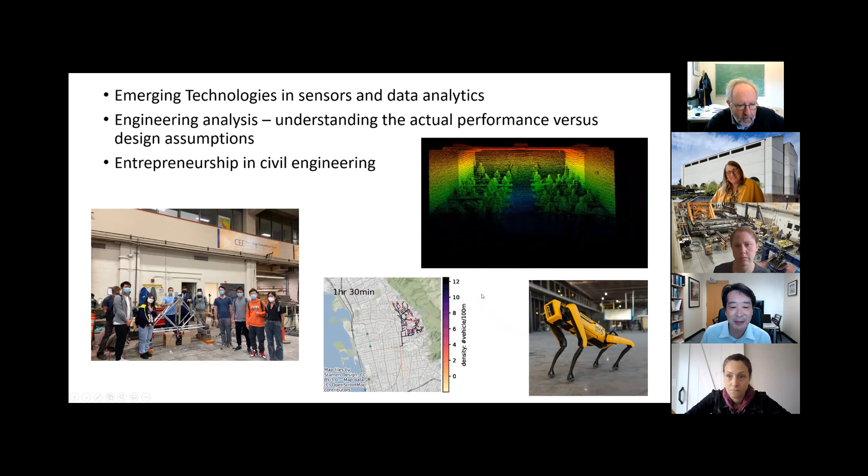Thank you very much. Thanks, Kenichi. Ada, how would you feel about going second on this parade?

Sure, I will bite the bullet and be the one to go after Kenichi's cool video. Thank you for that. So I did not have a production team for my class, but let's see. Okay. Can you see my screen? Yes. Okay.

So the class that I'll be describing is C175, Geotechnical and Geoenvironmental Engineering. And this is the class where you first get exposed, introduced, and hopefully learn some of the fundamentals behind both geotechnical engineering and a little bit about geoenvironmental engineering.

And so when we talk about geotechnical engineering, we basically describe the part of civil engineering that deals with natural materials that are found fairly close to the surface of the earth, which is what separates us from geologists and seismologists. We discuss basically the principles of soil mechanics and rock mechanics to a lesser degree, and how these affect the design of foundations, retaining structures, and earth structures.

In addition, we include certain elements that would then lead towards future classes that focus more on geoenvironmental engineering. We discuss properties of soils that impact the way contaminants may travel within soils, or how we would be able to get them out as part of a cleanup in a contaminated site, and also discuss a little bit about remediation of these sites.

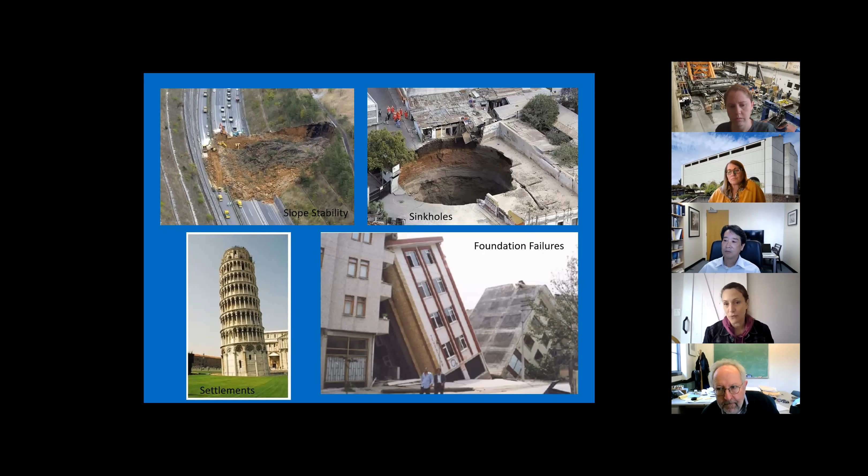So in terms of how the class tries to address that, we do focus, as I mentioned, on the fundamentals behind soil mechanics. So we start by studying the physical properties of soils. So this focuses on the mineralogy and specific characteristics that come with soils that then control what we study next, which is the mechanical properties. So how easy is it to compress some of the materials? How strong are they? And again, how that would relate to future analysis.

We will look at hydraulic properties of soil materials, and then also discuss basically the soil mechanics and hydraulic laws that govern these relationships. In terms of how we normally go about learning about these things, it's a multifaceted approach. And we won't cover everything in this class, but as you just saw in the class that was described before, observation and monitoring the behavior of existing infrastructure is a critical component in understanding how it may behave in the future. And so we do discuss case histories in the class.

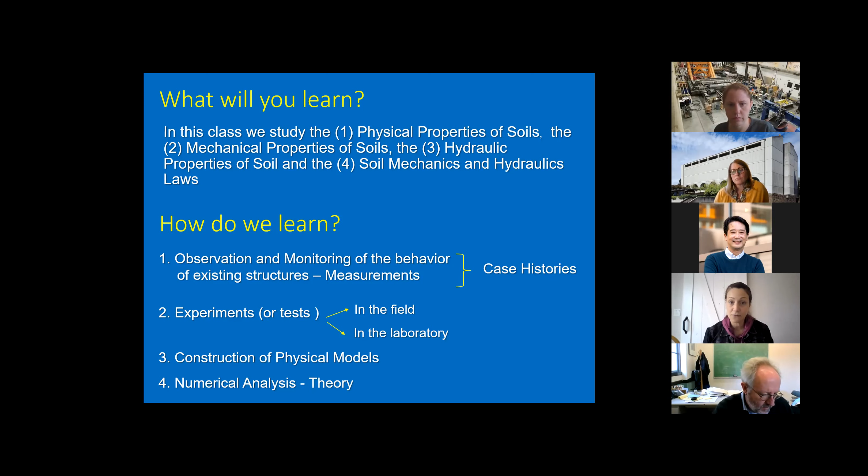We also focus on experiments, primarily in the laboratory, but there's also a field component for future classes that this class would definitely prepare you for. And we can also look at how we can construct physical models that are in a smaller scale for geotechnical applications to better understand the full scale response. And finally, we do discuss the theory, as I mentioned before, the laws that would be behind numerical analysis. So this class focuses on some of these components, but definitely provides the fundamentals so that you can build towards the other components in other classes that you may take concurrently with this class or following this class.

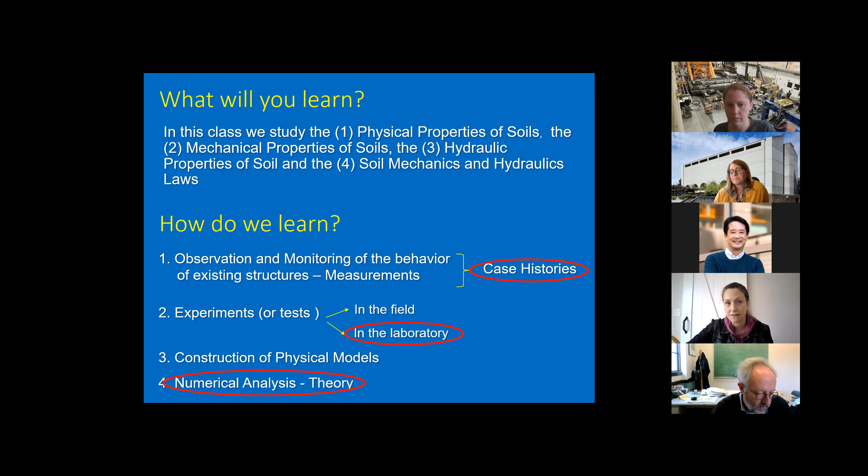The other important thing to mention about this class is that it is co-taught between one geosystems faculty and our lab director, Professor Mike Riemer, who basically works in the laboratory sessions of the class. So the class does have both weekly lectures and laboratory sessions. There are 4 sessions, so 4 of the weeks in the semester, you will have a laboratory session on a specific day. And the labs that we work on in this class deal with soil identification. There is a hydraulic conductivity test that we do, shear strength testing, and then also compaction.

And these labs basically work in that most of them are hands-on, not just demonstration labs, where you get to produce your own data and then summarize in a very short write-up. I really don't want to call it a report because typically it's just a couple of pages, but it's so that you get to understand how to present information that's relevant to what you just did and that sort of thing.

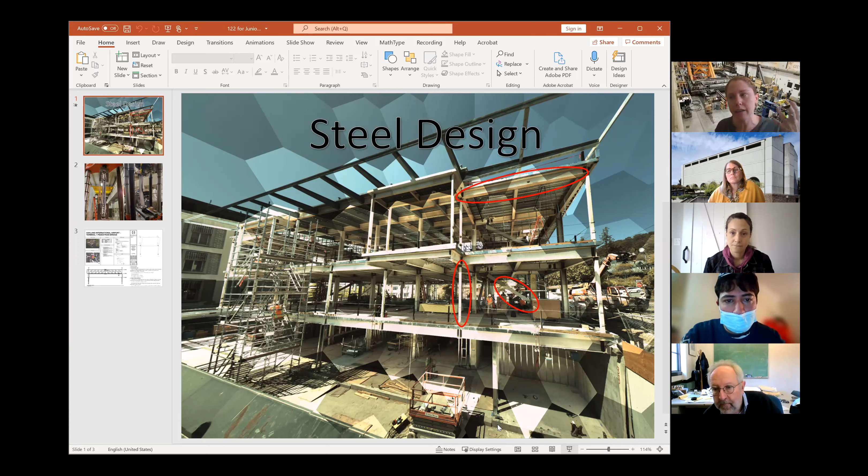So I teach the steel design course, which is sort of a synergy between taking your mechanics background and some analysis background, and then getting to see how we can bring that into the design world. There's also another course that's in concrete, but this one's just focused on steel systems. So this is actually Jacobs Hall. This is a building that's on campus right now.

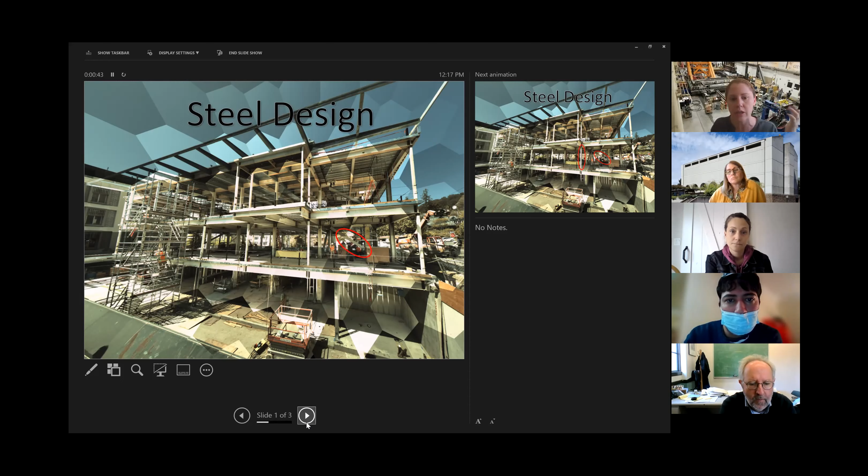And you can see that we talk a lot about how our loads come through our structures. So things going from the slabs to the beams to the columns, how things are transferred to the ground, lateral load systems like wind and earthquakes. And so we bring that together and talk about all the forces on these different members and how we would need to design them. So for example, how we would design a brace for tension and compression, how we would design a column for compression, how we would design a beam for the bending that's going to occur.

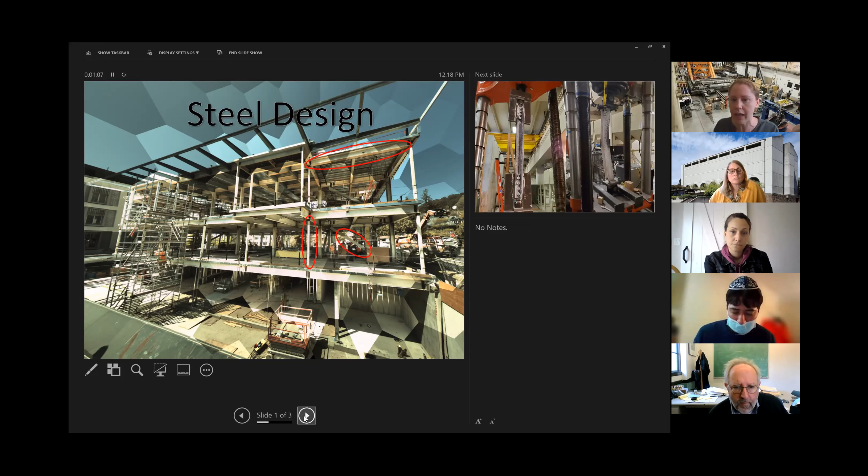So all of these have different forces on them internally and have different failure mechanisms. So we have to consider all of those things in our design. So when we're going forward with this, it's nice to have some visual representation. So we go down in the lab and we do a couple experiments, just like you do in geotech, but here we're doing steel components.

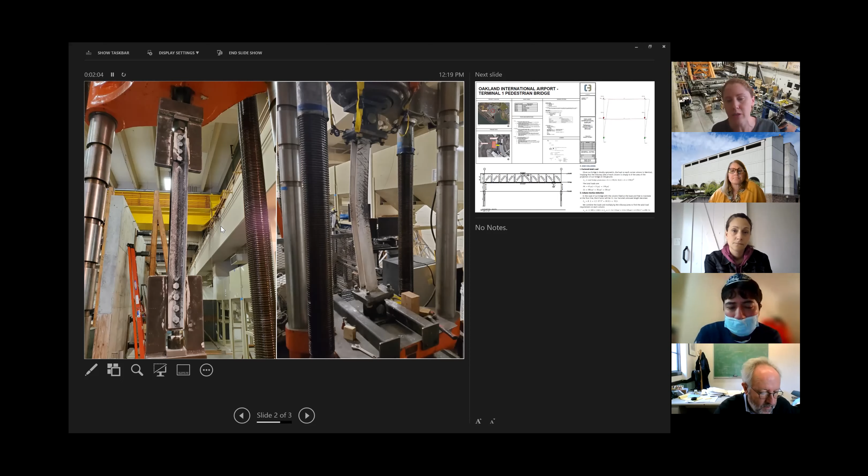And so it's important that we learn how to use the code and we learn what the code says, but we also learn what's behind the code, because the code is a living document. It's updated continuously, and our graduates need to be able to understand why there's something in the code and be the leaders in the field when we need to change the code in the future. So it's important that we understand why, not just how to do it.

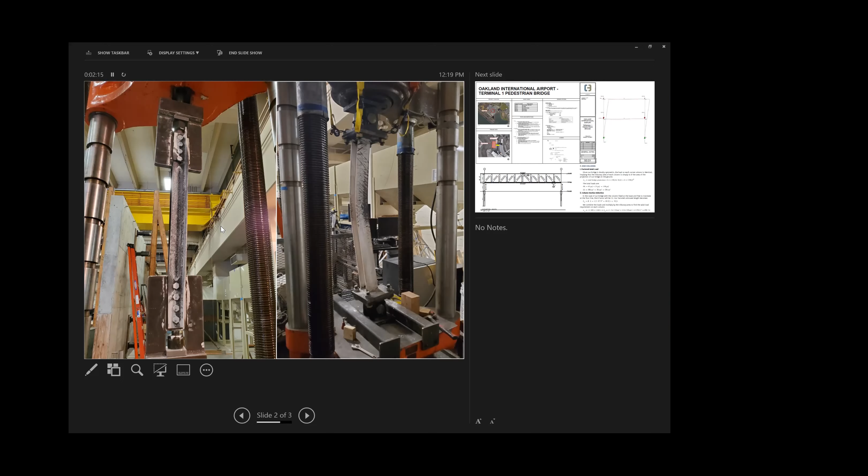Throughout the course, we work on a large capstone project with groups in the course. This is last year's project. Students designed bridges that were situated in the Oakland International Airport Terminal. So these are not real bridges, but a potential design. And so students put together professional design documents, produced all the plans for the bridge,

did deflection analysis for the lateral earthquake loads you can see on the top right, and also did the individual designs for each component, each section of the bridge. So you can see the column design on the bottom right. And they put together some very, very nice professional reports, and it involves a presentation to the other students to really help solidify the professional aspect that you'd have to be communicating all of this information to your team. So that's what we cover in steel design.

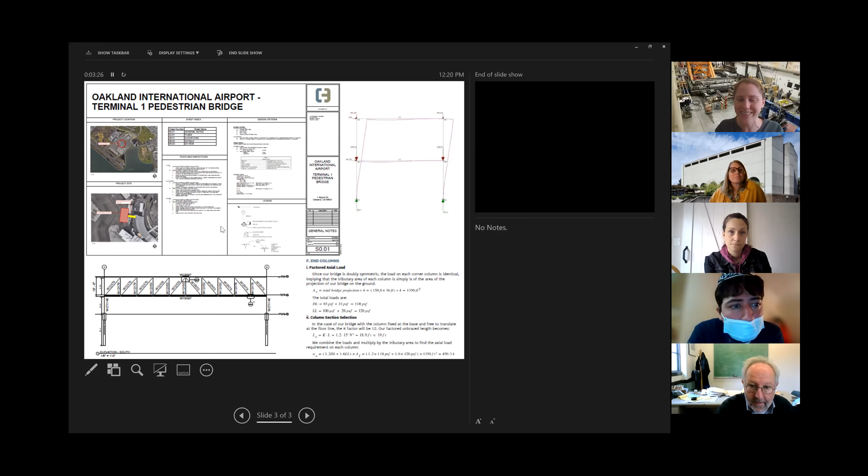Thank you, Tracy. Thanks very much. How about we get our department chair, Mark Stacey? Hi. Nice to see you. My attendance book says you were late. Yeah, I'm sorry I was late. Presentation will make up for that. You can mark me down. Okay. Great to see everybody.

I'm really happy that we have this opportunity to introduce you to some of our coursework. I think what you're seeing is a cross section of these upper division courses that we offer that would make up a lot of your experience were you to transfer to Berkeley to finish your degrees. What I'm going to speak to, and especially as Professor Soga was doing his bit, I was scrambling around trying to find some graphics and stuff. So I'll share my screen in a moment, but I'll apologize in advance.

I'm in the process right now of creating and launching a new course that'll be taught for the first time this spring in the area of climate change adaptation. And so I don't have my own video, but the web can help with that. And so this is a nice graphical interface from The Guardian. And what I like about it is it lets you scroll through for different climate related impacts.

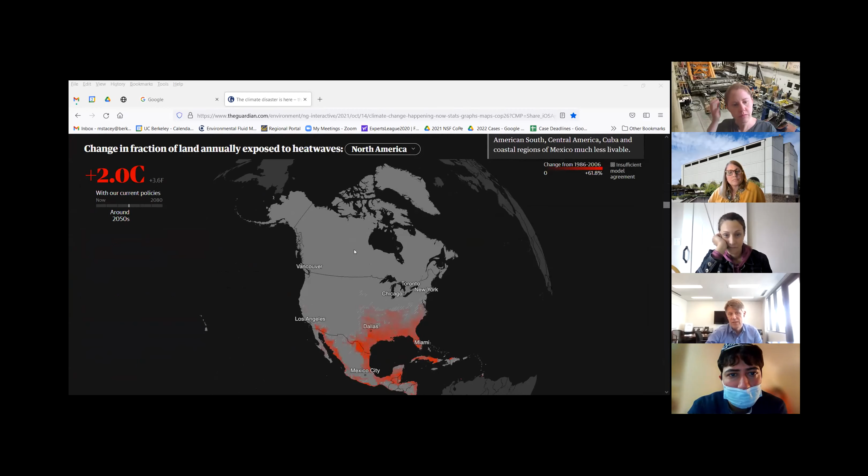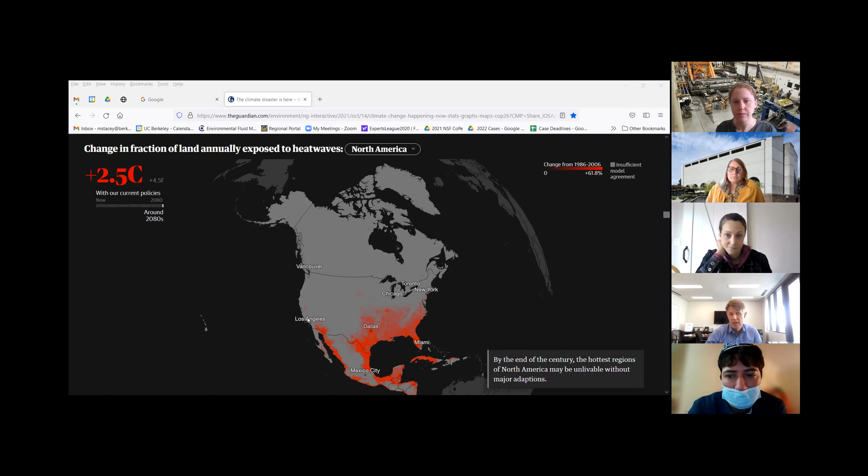So for example, heat waves first, you can scroll through and see, okay, if we can control global temperatures to within 1.5 degrees Celsius of historic, what do future heat waves look like? And then you can scroll to what does it look like if we hit 2 degrees, and then finally to 2.5 degrees. And you can see the spread of these annual sort of exposure to heat waves around the Southeast US and increasingly in the US West.

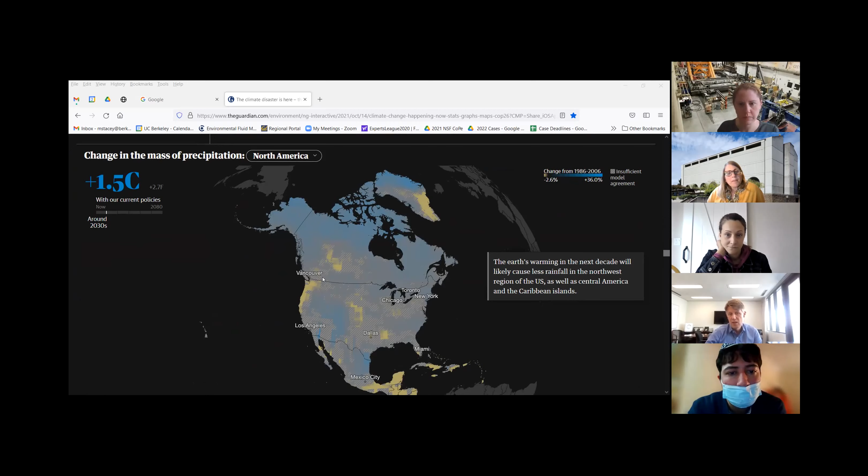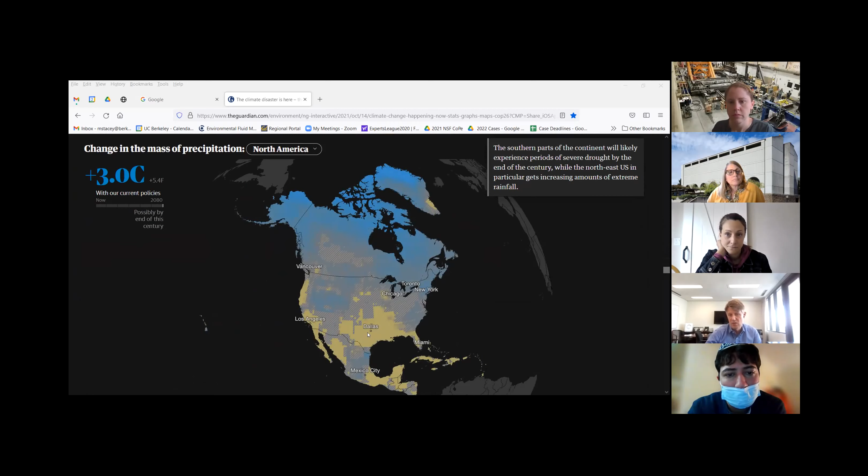And then other things that can be featured when we think about the impacts of climate change include floods. And so they have a similar graphic here to look at current policies, but with a warming planet, what is going to be more susceptible to these large changes in precipitation as we warm the planet. And you can see that much of the South and West US is affected by these changes in precipitation. Some of it's increases, some of it's decreases.

It's mostly about variability. And of course, wildfires is one that's been on all of our minds for a number of years, and you can track the change in the coming century. This is what's coming. As engineers, we have to continue to find solutions that work for today, but increasingly anticipate tomorrow. Anticipate tomorrow in a way that is sustainable and equitable and just, that ensures that everyone who is reliant upon those infrastructure systems or those other interventions shares in the benefits of them.

So the course that I'm developing, and I'll just share my screen for the syllabus now. I don't have anything fancier than that, unfortunately, but it is a course called Climate Change Adaptation. And the goal of the course is to understand holistically how we think about solutions and adaptation to climate change. And the way I've organized the course is into a series of modules, each one about 2 weeks in length. The first module kind of just sets us all on the same page, thinking about understanding climate change.

But one of the things that I want to emphasize is this interplay between the built infrastructure, the natural infrastructure, and the social systems, and how those three components define the future for communities, create certain interactions and interdependencies, and define the local impacts of that global change. So that's all this first unit, to get us all on the same page, so we're talking about these things in a holistic way that still centers the need to find engineered solutions, but with an awareness of how those engineered solutions interact with natural systems and with social systems, or perhaps leverage them in certain ways.

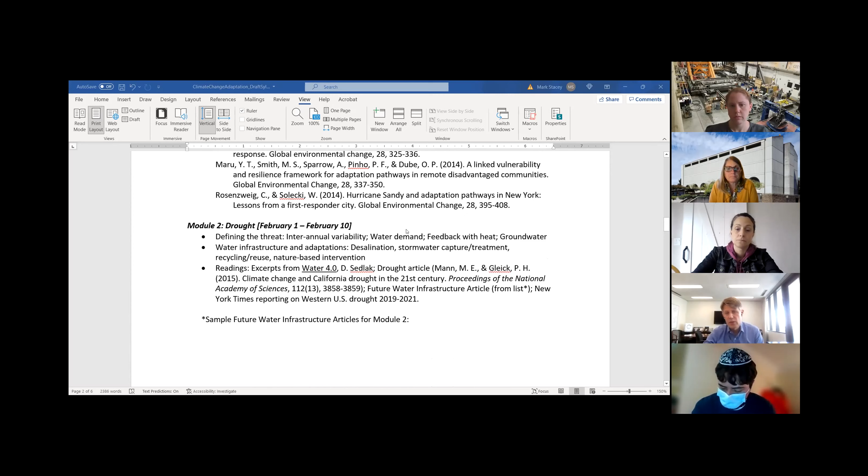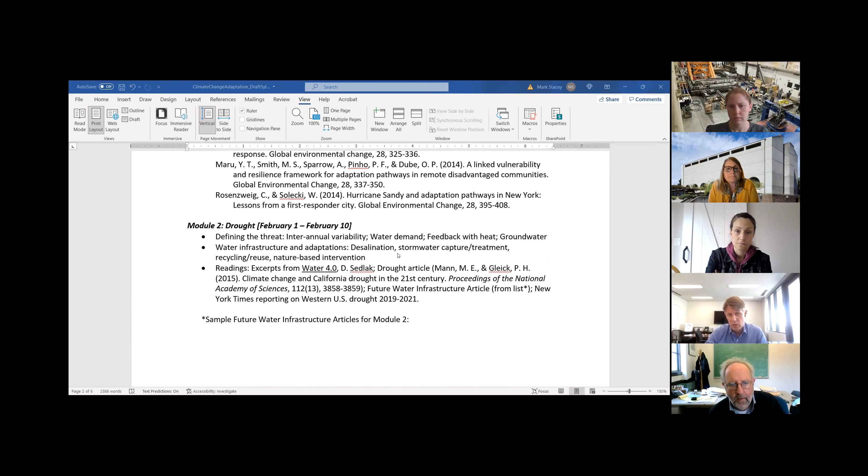Then we go through a series of modules that look at different future risks. For now, I've got drought as this next module for this first offering. That might be replaced with one thinking about energy transitions and global mitigation, just because of how it fits in the curriculum this year. But then later ones, urban heat islands, understanding that heat island effect, understanding how different interventions like green spaces, novel materials, cooling infrastructure interact with the function of a city, and understanding the social norms and behaviors that exist within that.

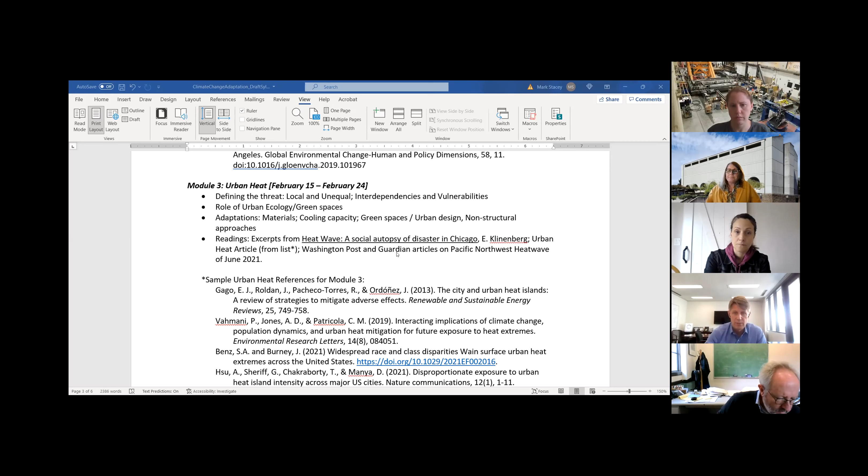One of the readings that we'll do in this unit is from a sociologist, which is an analysis of a heat wave in the 1990s in Chicago that explored how the green infrastructure in the sidewalks and other spaces in these neighborhoods not only provided cooling, but also encouraged interaction and created a social infrastructure and a social network that helped improve outcomes during the heat wave in Chicago. So it's this interplay between the built and the social infrastructures. I won't go into details on all of these. I'm sorry, I'm taking a long time.

We'll talk about wildfires. One of the themes here will be thinking about indigenous approaches to fire, where fire was a normal part of land stewardship, and thinking about how we've moved away from that, especially at the urban wildland interface, where a lot of the wildfire threats emerge. We'll also talk about smoke and air quality risks associated with wildfires.

Flooding, we're going to have two different units on flooding. One will focus on precipitation-induced urban flooding types of risks. That's really going to focus on extreme precipitation events, imperviousness of the lands, how green infrastructure can address that, and thinking about interactions across different systems and how that creates cascading failures as one system fails, affecting the next.

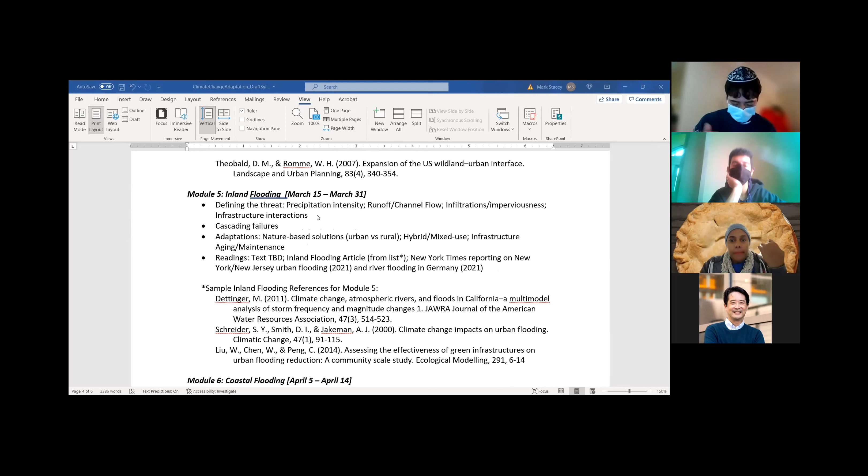And finally, a unit on coastal flooding, where we think about what's coming from the seas in the form of sea level rise, storm surges, rising groundwaters, and again, how that interacts with the natural and social systems.

Within each of these modules, we'll have a combination of a couple different assignments. There'll be a sort of traditional engineering style problem set associated with each module, but there will also be a more, I'll say a more thoughtful writing piece reflecting on the interactions that are exposed in this module. So yes, it's about the engineering at the core of the course, but it's also about the things that go with it. And so there will be some writing and some calculations as a part of the course.

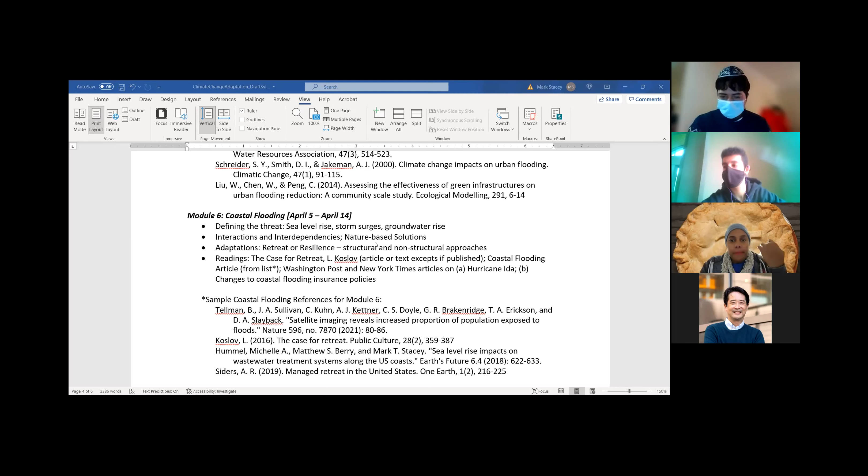And then finally, we'll finish this semester with some term-long projects where students will do a deeper dive into one or more of these particular threats and start thinking about actual interventions and solutions. So I'm super excited about this course. It's one that I've had kicking around in my head for about 5 or 6 years, finally taking the plunge to create it and launch it.

And it will be offered this spring, and then in future years, it will probably be offered in the fall semester. I would expect for transfer students, probably fall of your senior year, the second year that you're here at Berkeley would be the sweet spot for taking this course. So thank you for the chance to share.

Thank you, Mark. I think that leaves me. I'll go next. So let's see if I can share my screen here.

I want to talk about one of the classes I teach. That's called CE 155 with the title Transportation Systems Engineering. Now, I think we all understand that transportation is vital for society. When you think about it, transportation is really key to a community's economic well-being, as well as its livability. How pleasant is it to live in this city?

But on the other hand, transportation also imparts a good deal of negative impacts as well. There are negative impacts in terms of public health because traveling can be dangerous. And of course, we know that transportation exerts negative impacts on the environment in terms of greenhouse gas emissions, fuel consumption, and so forth. The simple point here is that transportation engineering deals with problems that are especially important. But at the same time, these problems are very, very interesting and intellectually satisfying to pursue.

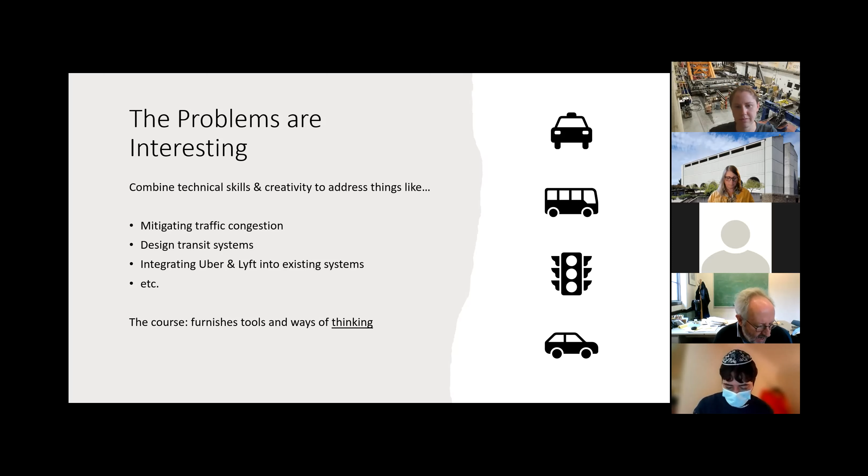So in the course 155, we try to furnish students with the tools to answer questions like this, but we also try to teach them ways of abstracting problems, meaning we try to teach ways of thinking about the problem so that the problem can be solved. Now, much of the course is devoted to two issues that have very different sorts of solution methods. We might call these two issues demand and supply, which kind of makes it sound like it's an economics class, but it really isn't.

When we're talking about demand in the transportation context, what we're really interested in is formulating and using statistical models to forecast how many people will want to use our transportation system, whether we're talking about a bus system or a rail system or whatever. And how are these human loads on the system going to change over time, say from one day to the next, or from one hour to the next?

Or maybe we want to predict the kind of modes people are going to take when they commute to work. How many people are going to drive? How many will take the bus? How many will ride their bikes, for example?

What we're dealing with in this aspect of the course is human behavior. And of course, there are no physical laws governing how people make choices about how they travel. However, there are some very rudimentary economic theories, and we can use these along with a field of science called econometrics to make some rather sophisticated forecasts about the human loads on the transport system.

Now, the second element of this course we could call supply. And here in this element, we're concerned with the infrastructure. And the infrastructure might be the roads or the metro lines, or maybe it's a nationwide network of airports. We're specifically interested in how well this infrastructure is performing when the infrastructure is subjected to its human loads. In other words, its demands.

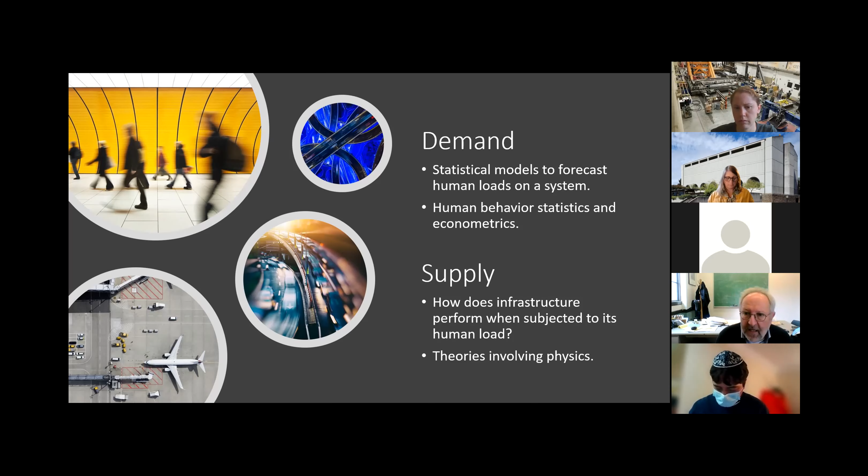But the thing is, there's kind of a challenge when we're using these demand and these supply side theories. And that's because demand models, they predict the human loads on a system, but these loads depend on how well the system is performing. Think about that for a minute. I mean, if we had a metro system that was very unreliable and very expensive to use, then in this case, not many people would use the system.

So imagine people for a second who kind of work on the demand side of the problem. And suppose in effect, they go to people who are interested in the supply side of the problem. And they say, hey, supply people, can you give us your predictions as to how well our system will be performing? And the supply side people answer back, they say, well, we'd like to help you with this, but in order to predict the performance of the system, we're going to have to understand the demand for your system.

And that makes sense, of course, because when systems get really crowded, they don't perform well. So what I'm trying to point out here is there's a real dilemma we have to deal with. We're kind of chasing our tails. That's because the outputs from a demand model are needed in the supply models. And the same is true in reverse. The outputs from supply models are needed for the demand models. What we have here is something called an endogeneity problem, and there's lots of nice theories for dealing with this.

But that brings us to a point I really want to make about the class. Although the course deals in a great deal of theory, everything about the class is very practical. Because everything we talk about in the class are ideas that can and should be deployed and tried in real world situations to solve real world problems.

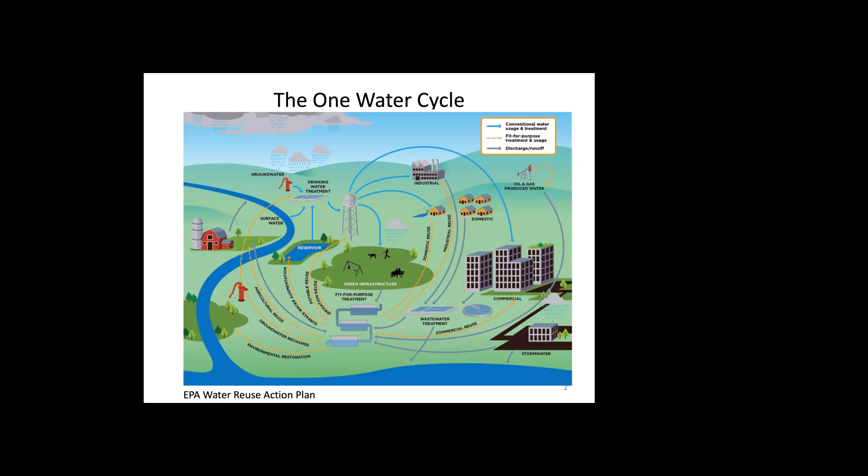You probably are familiar with the natural hydrologic cycle, where water evaporates from the oceans and then rains on land and runs back into the ocean and replenishes our aquifers. But because we have so many people on this planet, we can't just rely on the natural hydrologic cycle to provide sufficient quantities to our human populations anymore.

So we have developed, in particular in this country, massive infrastructure to supply adequate and safe water to our human populations. It's taking water either from the groundwater or from lakes and rivers and delivering it to our populations. And then when you flush the toilet, most of us have the privilege in the US of not really worrying about what happens next to that water.

That's actually not the case in a lot of the rest of the world. Many people turn on the tap and the water's not coming out of it a lot of the time, or they may not even have a tap. They have to go and collect their water manually. And then they know exactly where their waste goes because they see it in the environment. It doesn't just disappear in a pipe and get taken away.

So my point in bringing this up is there's a lot of important work to do in bringing just basic services to populations throughout the world that don't have access to this incredible infrastructure that we have in the US, but it might need to look different. Just because we have systems of delivering water and treating our waste in this country, it doesn't mean that

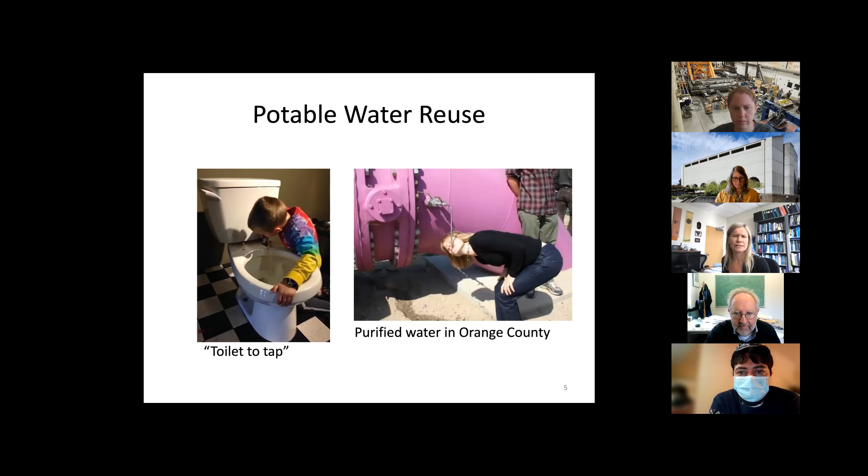that we actually implement in California now, where we apply many, many, many different treatment processes to make wastewater safe to drink again. So this is me actually drinking purified wastewater at a facility down in Orange County. And the way we can do this is by using a lot of different treatment processes.

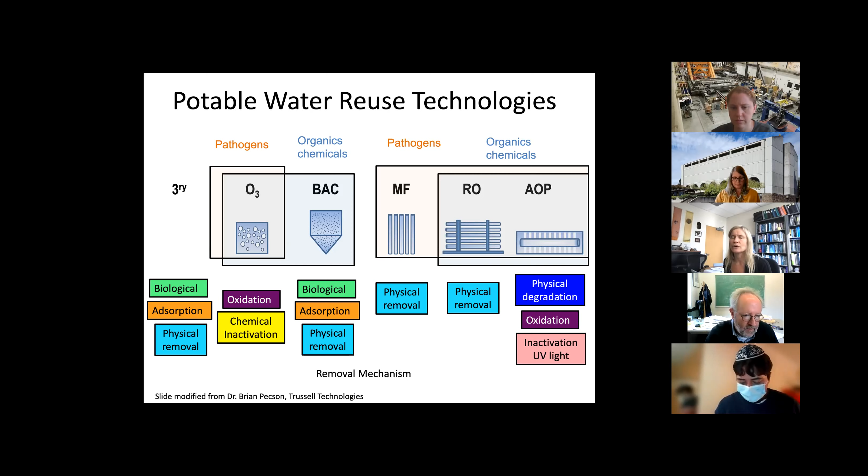We can use ozone, we can use activated carbon with biological degradation, we can use membrane microfiltration, we can use reverse osmosis, we can use hydrogen peroxide and ultraviolet light to achieve advanced oxidation and remove all of the pathogens and organic chemicals that are of a concern. So that's just one example of innovation. And you also know California is the heart of innovation.

And so in my class, what we talk about is, what are our water systems of the future going to look like? What do we want them to look like? And how are we going to get there? And I've sort of emphasized technologies, but we don't just talk about technology. We talk about policies and politics. We talk about the role of climate change and the intersection with energy. And we talk about pricing and finances and affordability.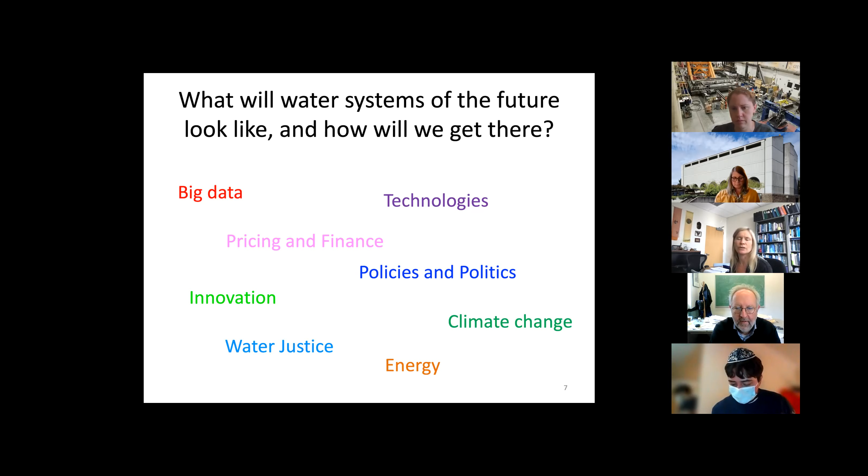And we talk about water justice. We talk about how we can be leveraging big data. And the overarching theme is innovation. And my goal is that you become a water change maker by the end of the semester. And I'll leave you with an inspirational quote. Anyone who can solve the problems of water will be worthy of two Nobel Prizes, one for peace and one for science, by our former President Kennedy.

Thank you, Cara. Thank you very much. So, to everyone in attendance, you've now had a chance to see a sample of the kind of courses we teach at the undergraduate level. These were only a sample. There are many more courses we offer. This gives you an idea of some of the interesting things we try to tackle and the breadth we try to expose our students to.

At this point of the presentation, I'm wondering if any of you have any questions. Maybe you have questions about a specific class or something more general about classes or the undergrad program, whatever might be of interest to you. We have a few minutes now. If anyone has a question, they want to shout it out or send it out via chat. This would be a good time.

Oh, hello. Hi. Dr. Hussey, my name is Mahali Samuels. I'm a Santa Monica College student, and my major is environmental engineering, obviously, as I'm here. I have lots of questions.

So a short question to you: for your transportation course, would you suggest some prep courses to have a better understanding, like statistics, psychology, and economics? You know, I think a good grounding in physics and math is probably what's most important. We deal with probability, and a course in probability and statistics is fine, but if not, we can deal with that when it comes up.